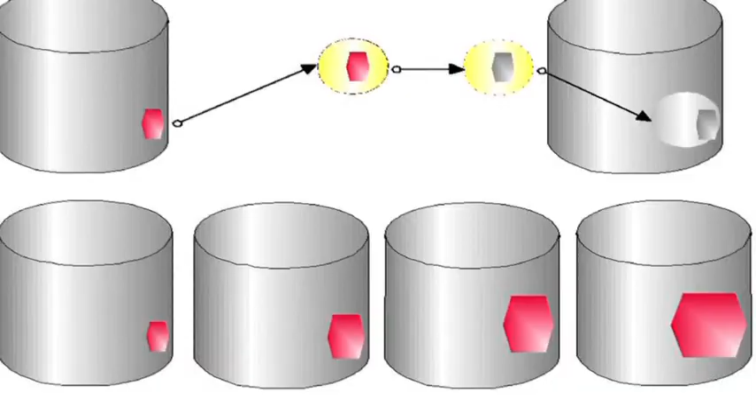Z300 Patented Process Technology. The reason for corrosion of any metal is unsaturated oxides on the surface. The growth of oxides is always in mathematical progression, so oxides on the surface should always be as low as possible.

Dimple Chemicals and Services Private Limited has invented a patented process technology called Z300 to control the growth rate of corrosion.

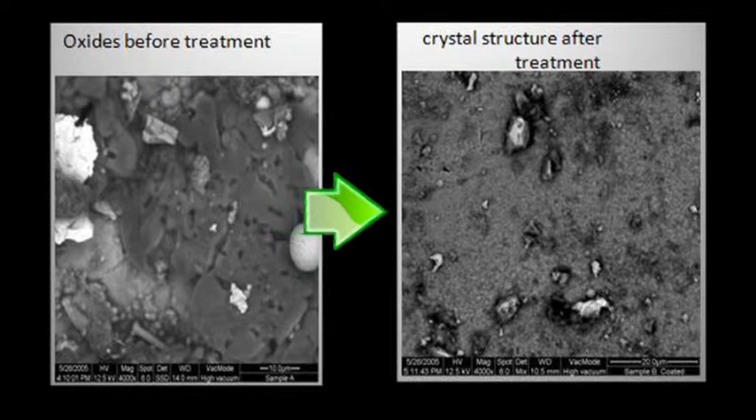Z300 converts oxides into docile form by crystal structure modification. This docile oxide along with a polyester polymer retards the rate of corrosion up to 70%.

Some of the properties of Z300 are anti-static, non-oily, water repellent, biodegradable and non-toxic.

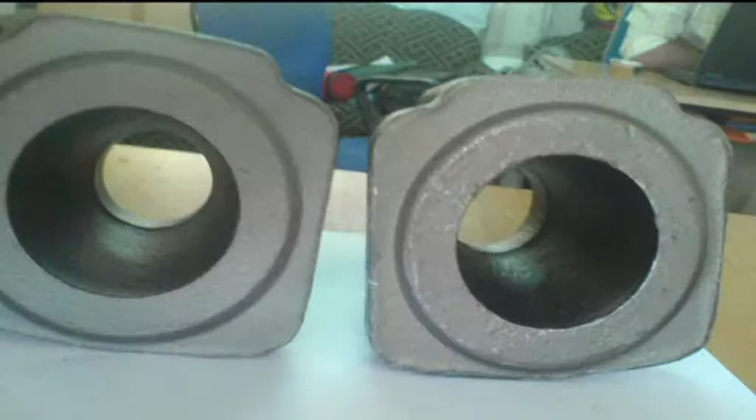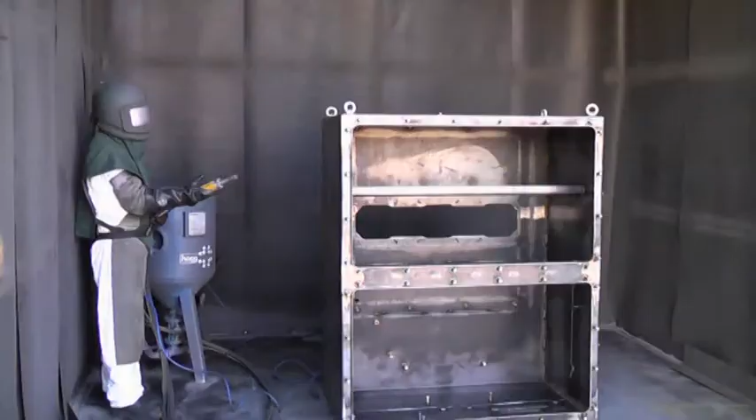Some of the features of Z300 are: gives better dimensional control, improves surface texture, controls bimetallic and biocorrosion, eliminates non-eco-friendly processes like shot blasting and acid pickling, eliminates washing before welding, and eliminates surface preparation before painting.

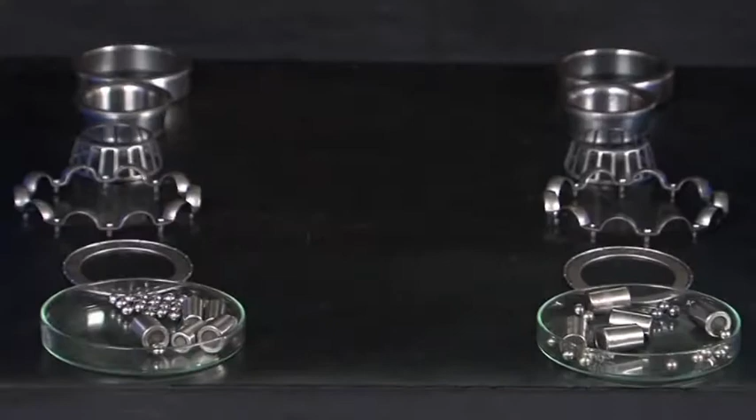Let us conduct 3 trials: indoor protection, outdoor protection and resistance to humidity test. Having taken 3 sets of TRB rings for testing, let us note their corrosion.

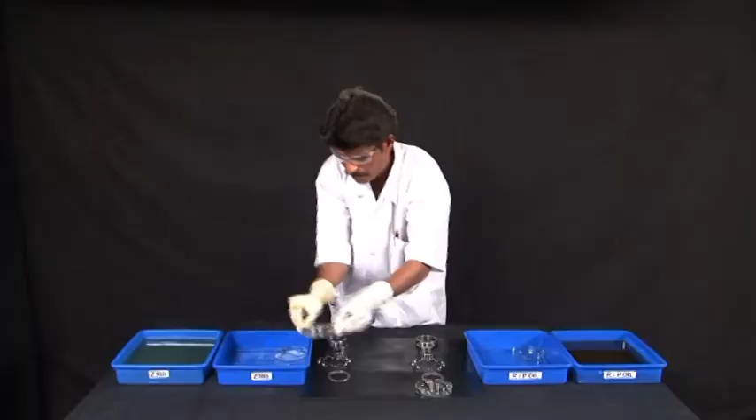Let us compare Z300 with that of rust preventive oil. While conducting the trials, the TRB rings are dipped in Z300 and rust preventive oil respectively, after which they are drained in separate containers.

Now we shall once again note the corrosion reading.

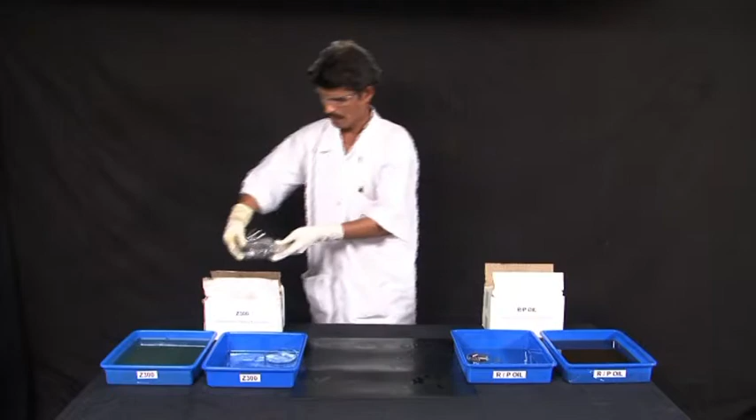While conducting the trial for indoor protection, we will pack these components in a polythene bag and place them in a corrugated box.

In the trial for outdoor protection, we will keep these components in a high humidity area near the cooling tower.

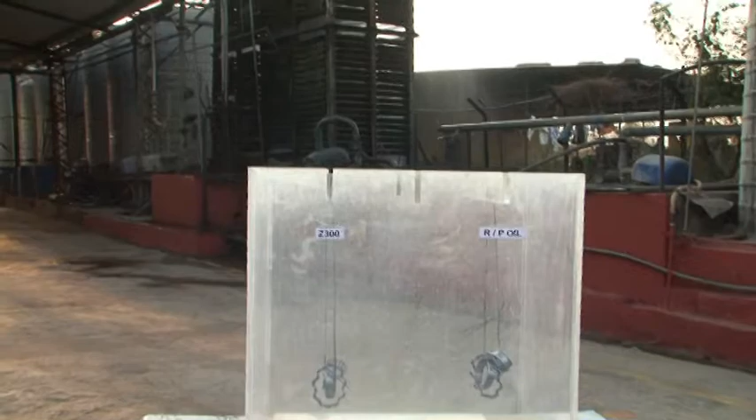In the trial to test resistance to humidity, we will keep these components for testing in a humidity chamber.

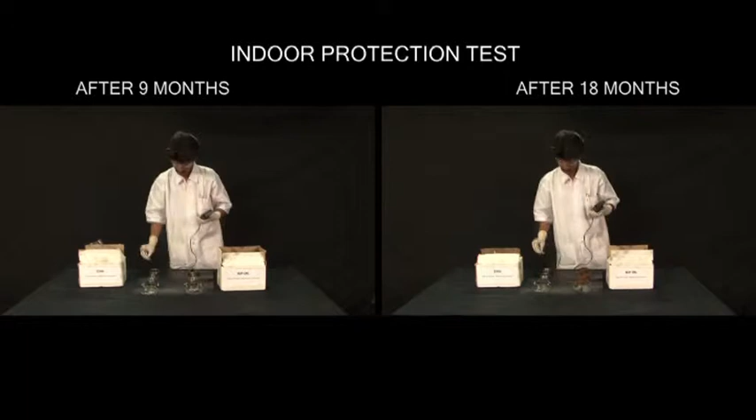Indoor protection. After 9 and 18 months, we can observe that the corrosion is more in the TRB rings dipped in rust preventive oil as compared to Z300.

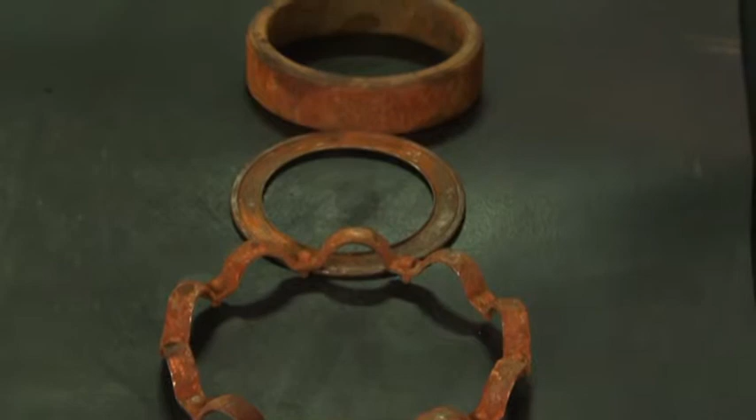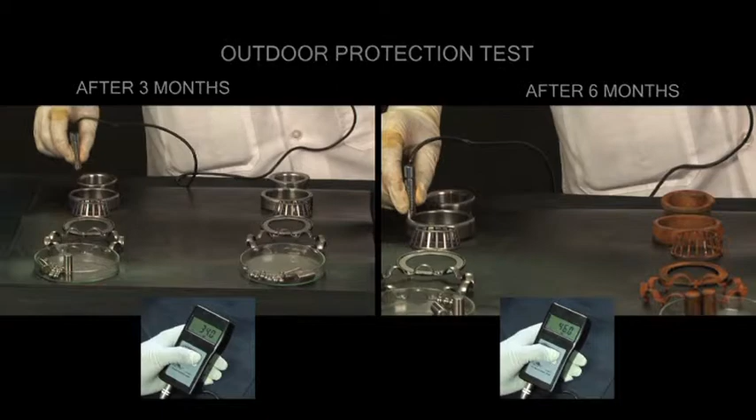Outdoor protection. After 3 and 6 months, the corrosion is more in the TRB rings dipped in rust preventive oil as compared to Z300.

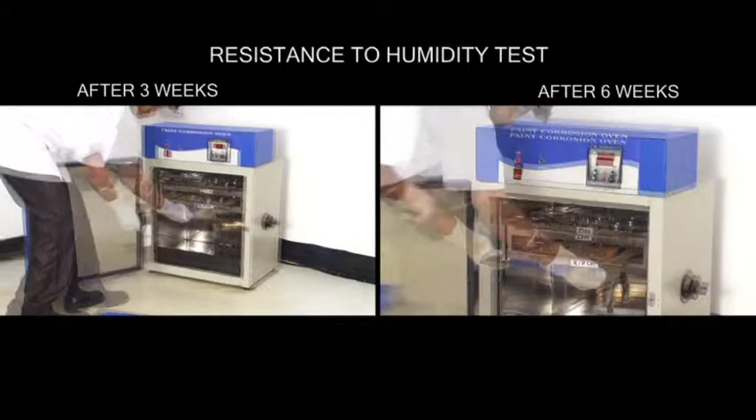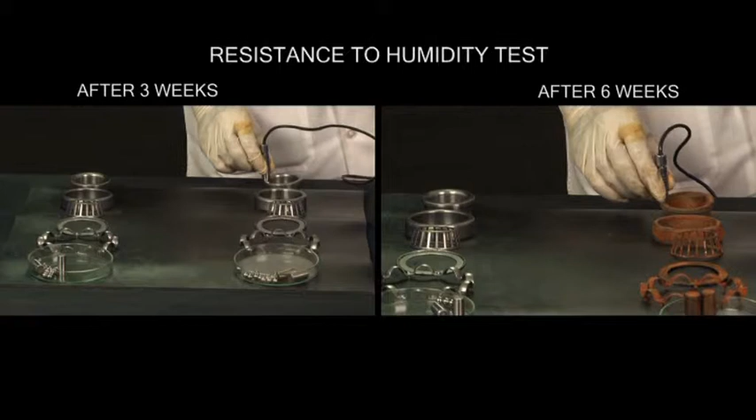Resistance to humidity test. After 3 and 6 weeks, the corrosion is more in the TRB rings dipped in rust preventive oil as compared to Z300.

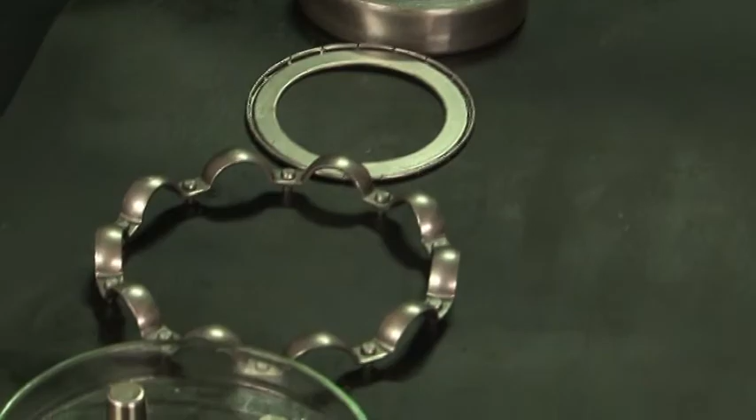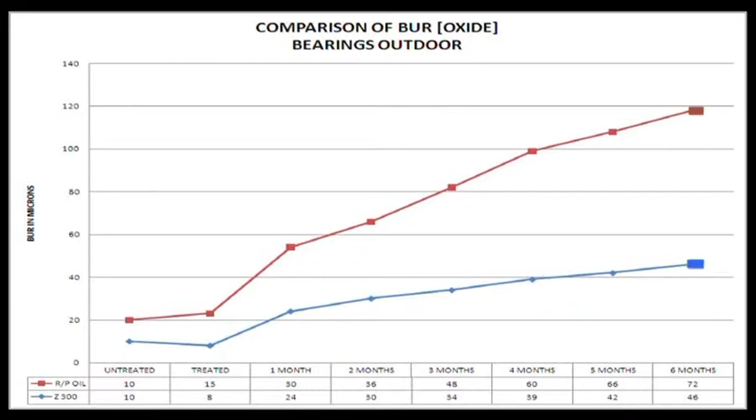Thus, through the various observations and corrosion readings, it is proven that the corrosion is 70% less in the TRB rings treated by Z300 as compared to rust preventive oil.

Application procedure. Z300 can be applied by various methods such as dip and drain and spraying.

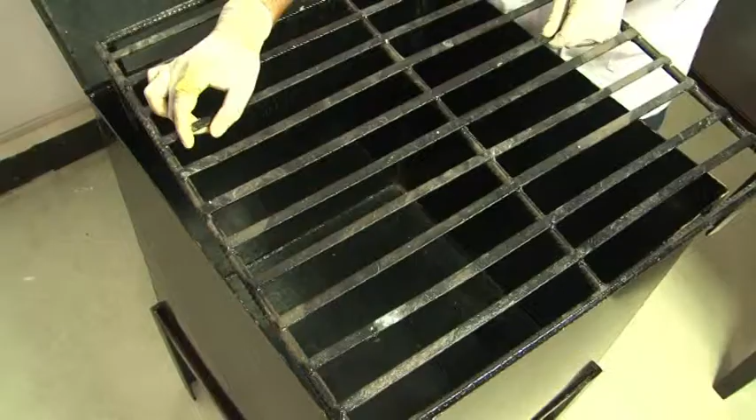In case of the dip and drain method, a tank with a drain valve and partition are the prerequisites. We can dip various components into the tank and keep them on the drain board for draining the excess material.

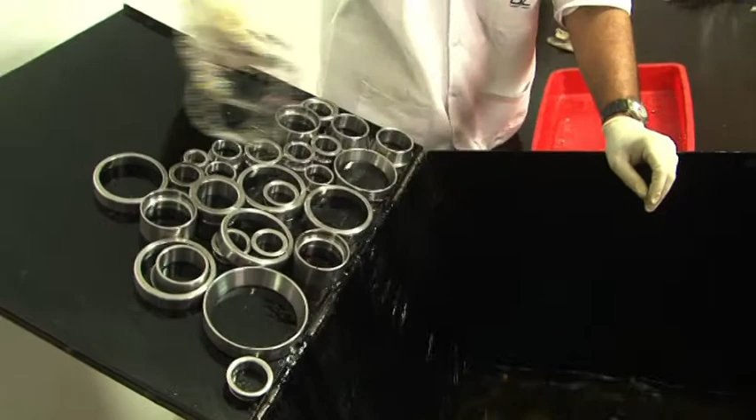Filter. After using Z300, the same can be filtered using a cotton cloth and then reused.

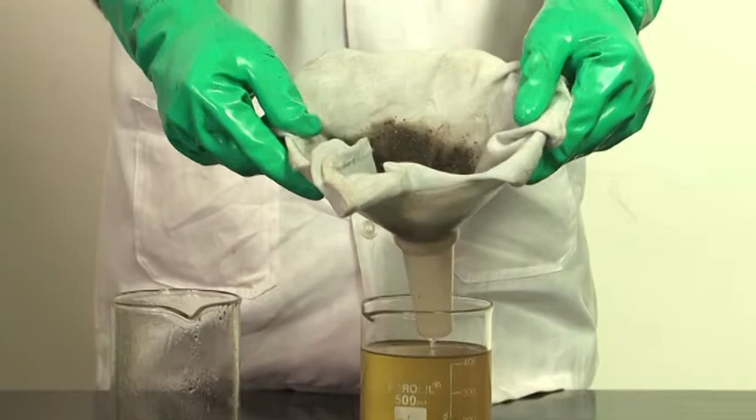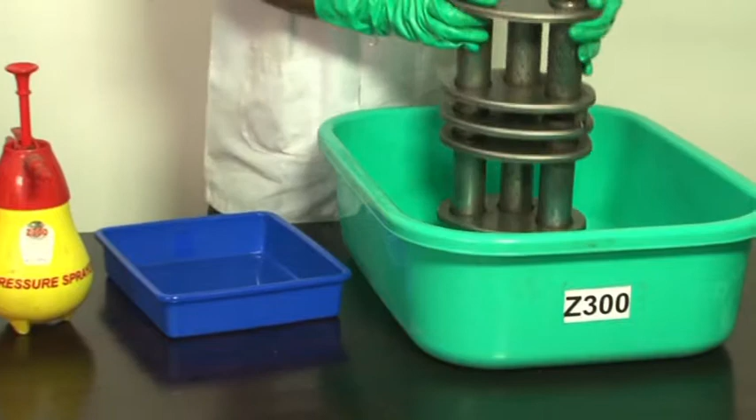Spraying method. In the case of larger components where the dip and drain method is not suitable, the spraying method can be used.

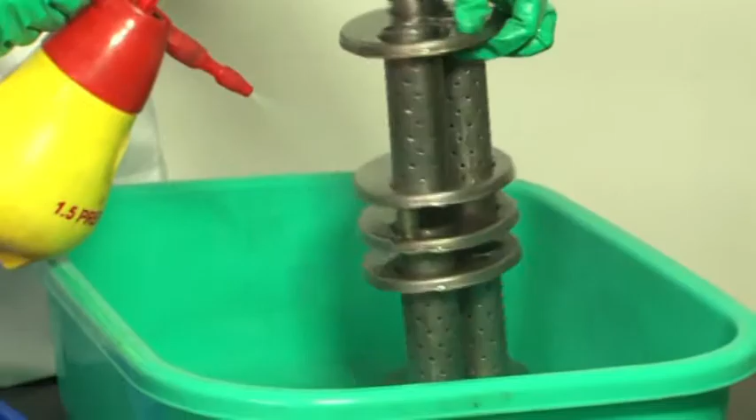In the case of assembled bearings, Z300 can be used for controlling the corrosion as well as for reducing the frictional load between rolling elements.

In the case of sintered products, Z300 can be used as an impregnating oil for the prevention of bimetallic corrosion as well as for lubricity required in various engine components.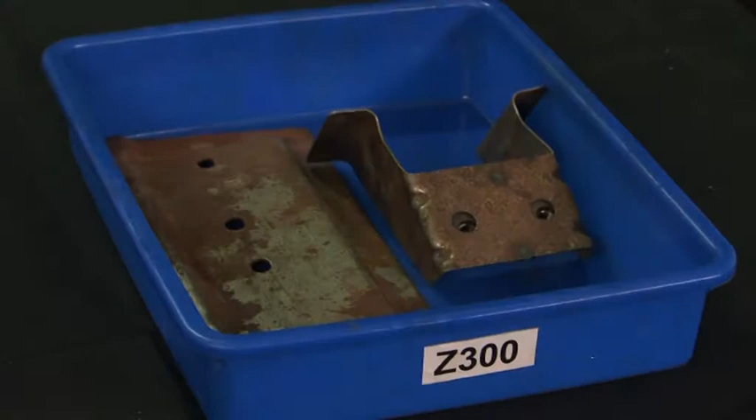Our product Z300 can also be used for the recovery of corroded steel. Generally, corrosion starts at the welded joints and migrates onto the surface.

We can see that the corroded sample has corrosion up to 100 microns. After spraying Z300 on the corroded component, followed by scrubbing and wiping, the difference is quite evident in front of us.

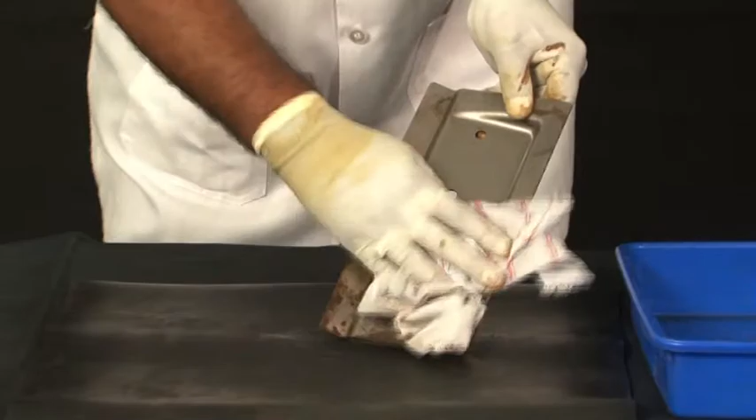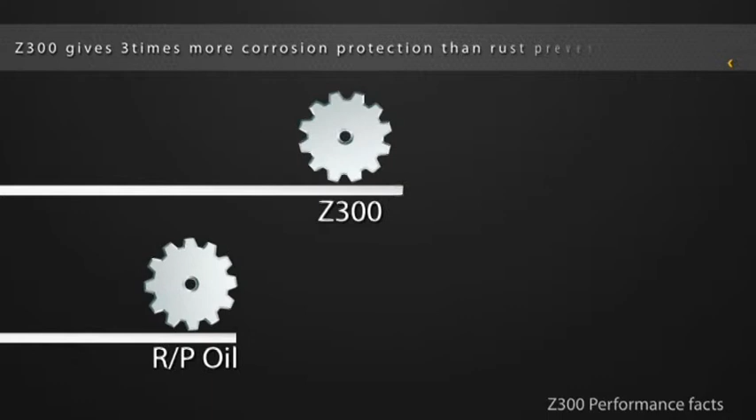Now let's have a look at Z300 performance facts. Z300 gives 3 times more corrosion protection than rust preventive oil.

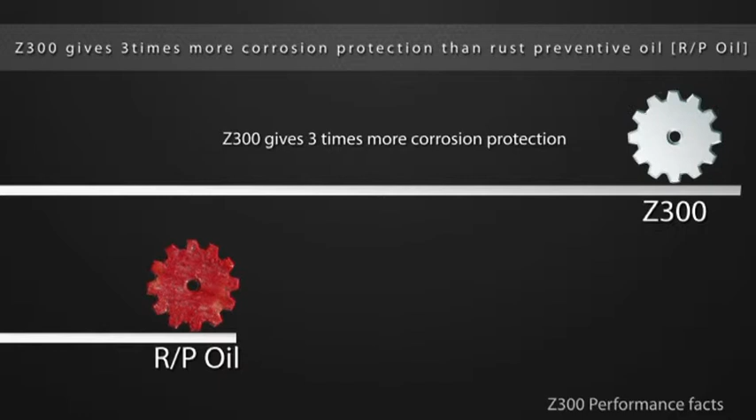Consumption of Z300 is 40% less than rust preventive oil.

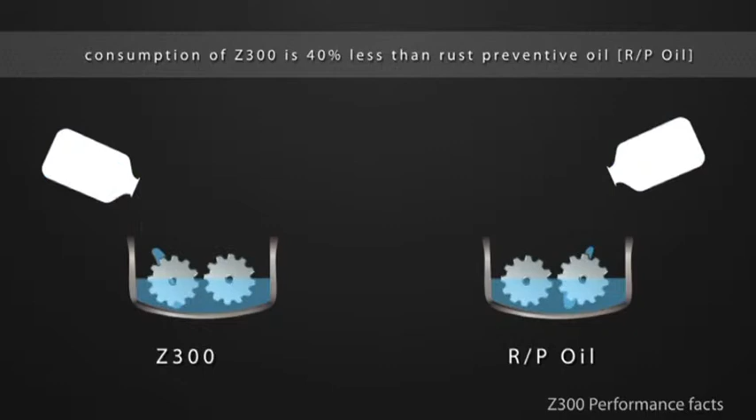Wastage of Z300 is nil and 5% for rust preventive oil.

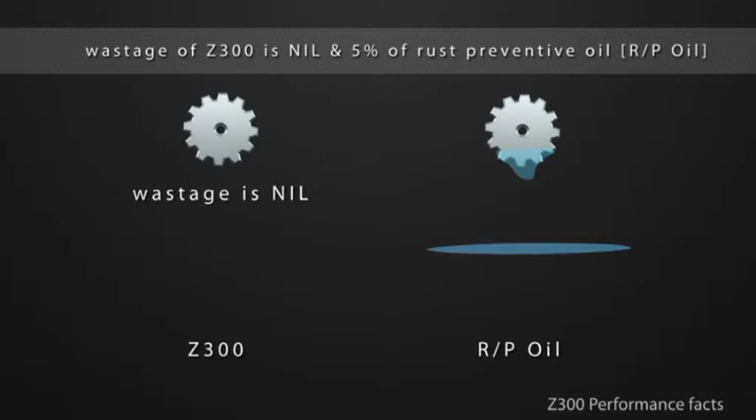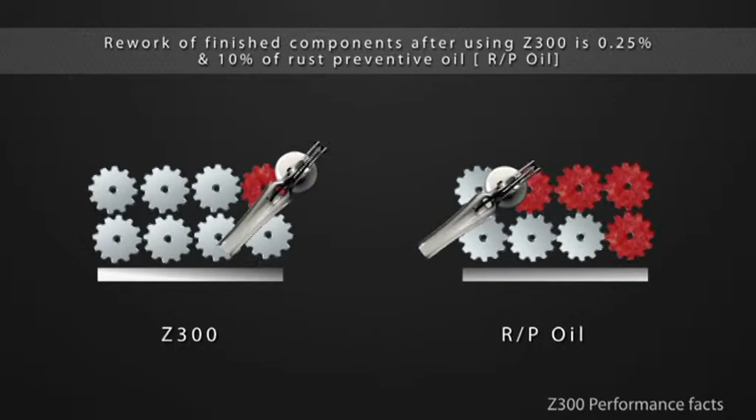Rework of finished components after using Z300 is 0.25%, and it is 10% for rust preventive oil.

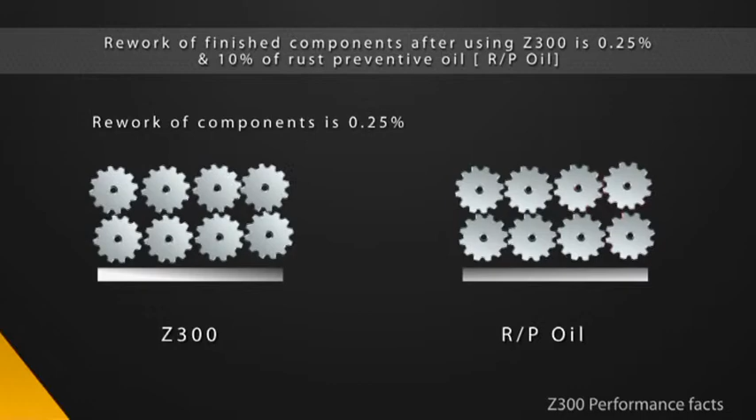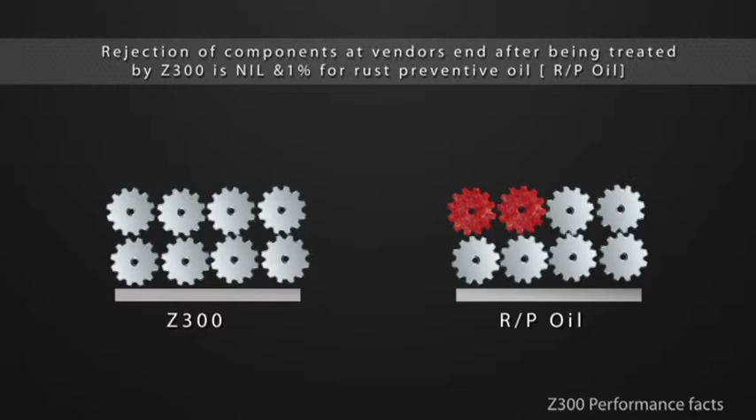Z300 saves approximately 50 lakh rupees per annum for a manufacturing unit of 500 metric tons per month capacity.